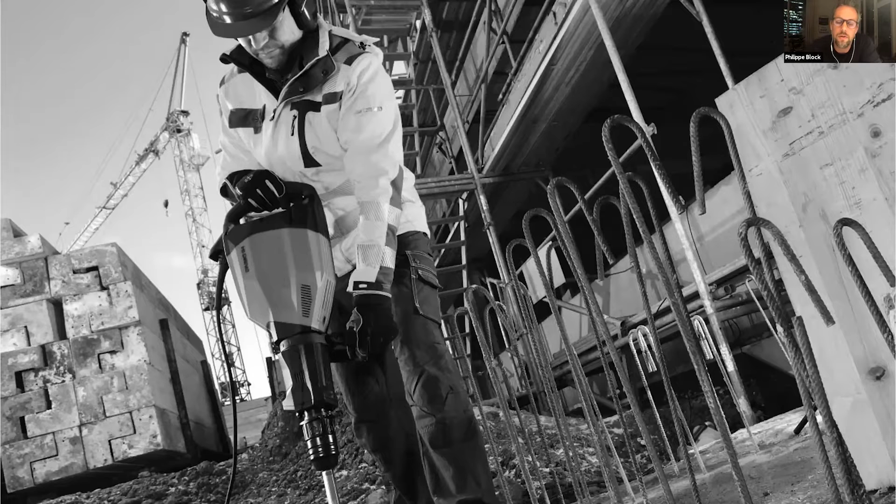I really hope that it will not happen like this, like we have been constructing in the last century, practically. And the reason I say that is because globally we are a major polluter as an industry. Building and construction are responsible for almost 40% of human-made greenhouse gas emissions, 40% of the use of virgin materials, so resource depletion is a big challenge, and 40% of global waste production, and in many areas of the world this is even much higher.

And then also, of course, the energy that all our buildings use, both in construction and in operation. So with these few slides, I hope that you agree with me that we desperately need to change the way and rethink indeed how we both design and build our structures.

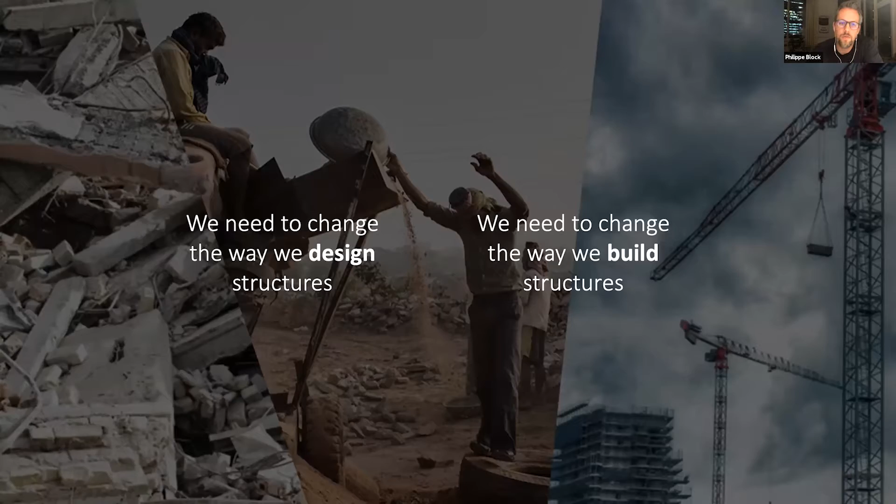As you heard in the introduction, I am a hybrid architect, structural engineer. So I wanted to specify that I will be focusing in my talk, and our work in general focuses on the embodied emissions associated to the built environment. That means everything that happens until you turn the key, until you basically start operating or occupying a building. So everything related to producing materials, construction, transport, and so on.

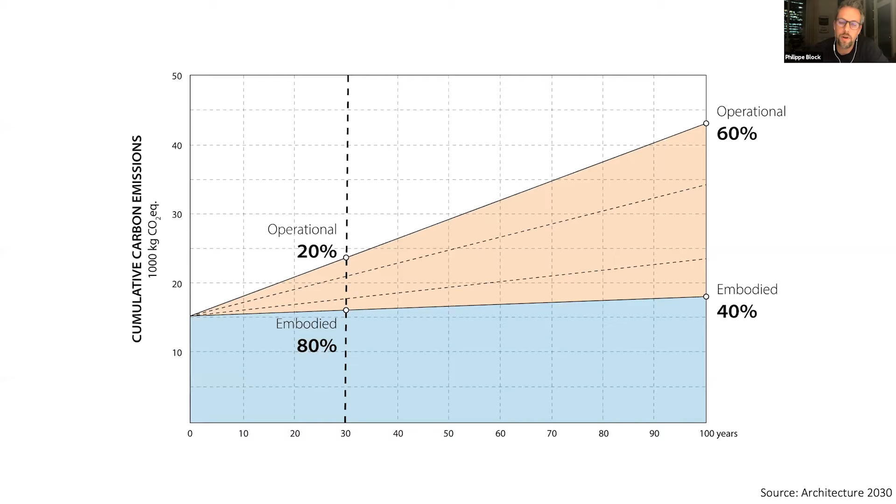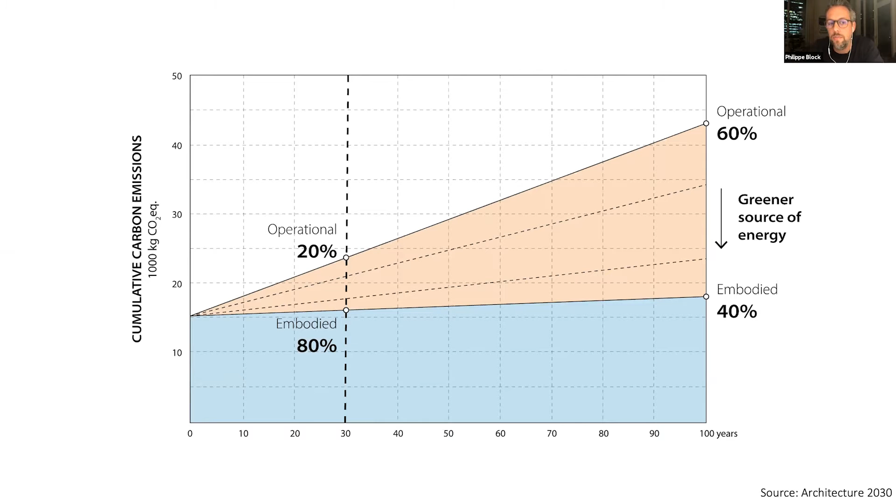I see this as the key challenge and a big bottleneck to focus on these embodied emissions, because, maybe cheekily said, or naively said perhaps, one has a theoretical solution for the operational energy, just going to green sources, renewable sources. So theoretically we would have a solution to deal with the operational energy, but we are still left with the embodied emissions. In order to really address what is a potential strategy, I like to use this equation.

Don't worry, there won't be many equations, or this is in fact the only real one. I borrowed it from my colleague, Catherine de Wolf, who did her PhD at MIT with the same advisor, John Ochsendorf. She describes, or dumbs down, the global warming potential into this simple equation that outlines what really matters.

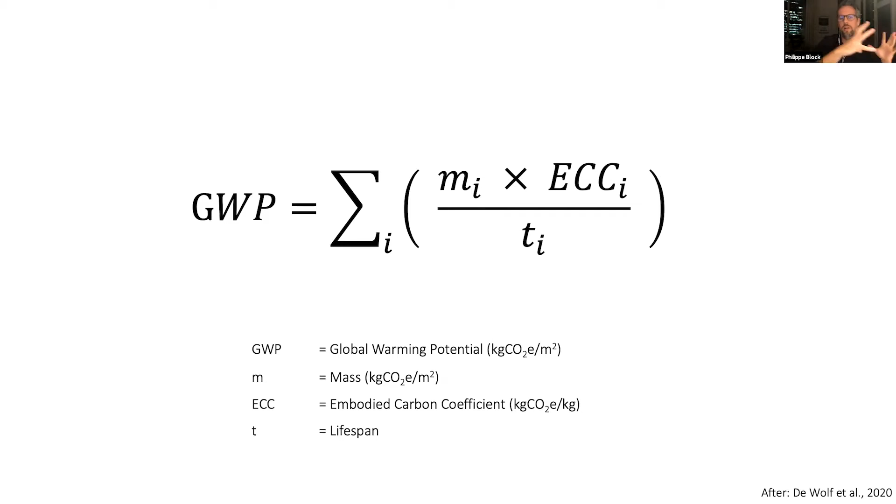She says you basically want to take the sum of all the parts in your building, and what matters is the mass, how much material you use, but also the ECC, which stands for embodied carbon coefficient. This is a representation of how polluting, how bad a material is towards the climate. So it's not just about building lighter, with less material, but also about using the right materials, low pollution materials, and so on.

And then lastly, all of this is divided by the time that a material is used. That's the framing of circularity, where we want to ideally extend the lifetime of a building by designing for future use and adaptability. If that's not possible, we want to design for reuse of components and parts. And again, if that's not possible, we want an efficient recycling outlook to keep materials in the cycle. So this equation really clarifies what we're after, how we can combat embodied emissions.

It becomes clear that as a structural designer, you can have quite a bit of influence here. Our group approaches this problem with two concepts: the first we call strength through geometry, and the second material effectiveness. I'll explain both, but they're of course related to the equation I just pointed out.

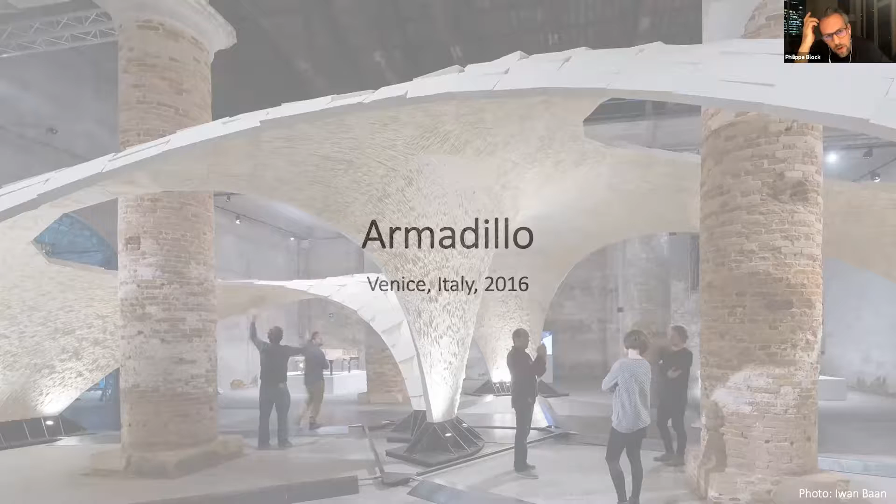Let's first look at strength through geometry, by walking through a few projects we've done. I want to start with the Armadillo Vault that we built for the 2016 Venice Biennale. What you're looking at are 399 cut pieces of stone held together by gravity and geometry only. There's no mortar, no glue, no reinforcement holding this together. This already demonstrates what you can achieve when you get the geometry right.

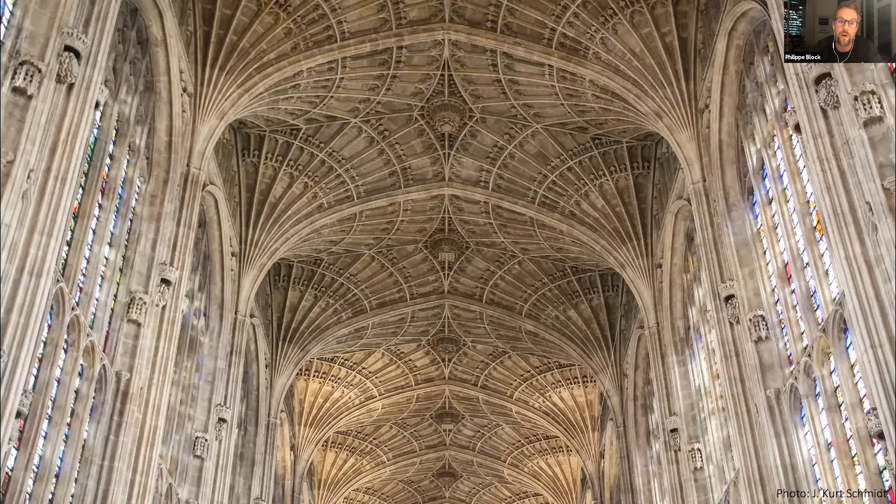The reference, or inspiration, is of course from my PhD at MIT with John Ochsendorf on the assessment of historic structures, these beautiful structures, trying to find tools to explain why and how they're standing and how long they'll still be safe.

What you might not see in these beautiful fan vaults at King's College from below is that if you were to calculate the thickness of these large stones, kept in compression because of their good geometry and not because we're adding materials, reinforcements, or high-tech solutions, the thickness of this shell over its span would be proportionally the same as an eggshell. This was mind-blowing to me, and it made me realize that modern engineering had perhaps forgotten some key concepts that made these structures possible.

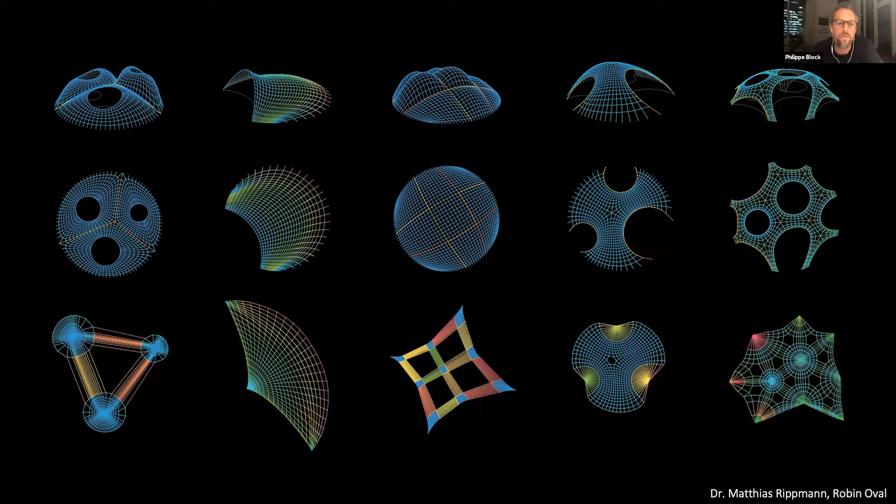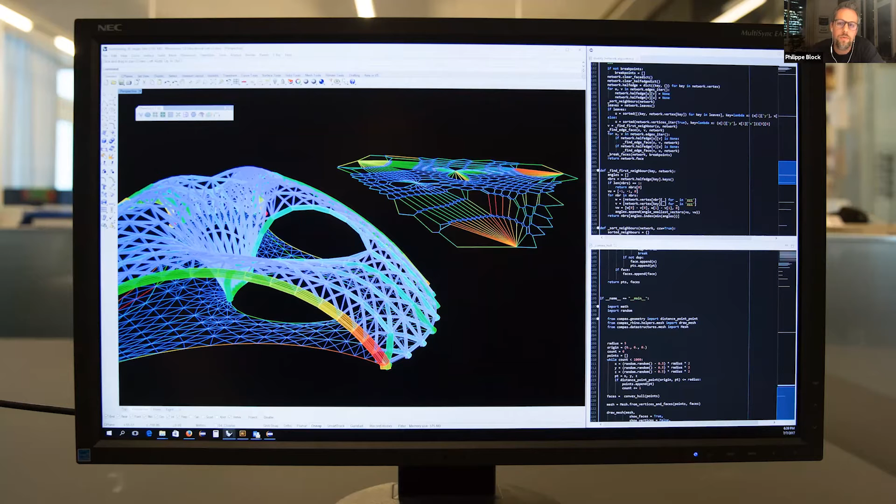So we've been developing tools, including graphic statics-based tools, meaning quite intuitive methods that allow you to rediscover these kinds of geometries. We feel strongly about sharing everything we develop. This is a print screen of this shell's initial modeling done with RhinoVault, a tool we share openly so others can discover these same elegant geometries. I want to emphasize that this super thin shell, just 2 inches thick, of dry assembled stone, is stable and safe because of its geometry, not just by adding materials.

Here you see the team out of Austin, Texas, the Escobedo Group, assembling this spectacular statement. We did this crazy vault not necessarily because we need more stone vaults in the world, but to shake the community, to show what you can achieve through geometry. You can activate these humble materials, and rediscover the elegance of why cathedrals are still standing after centuries.

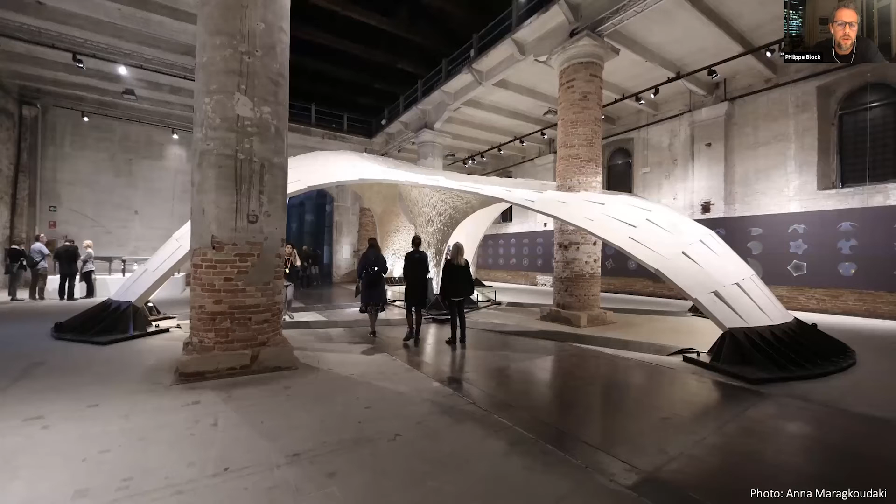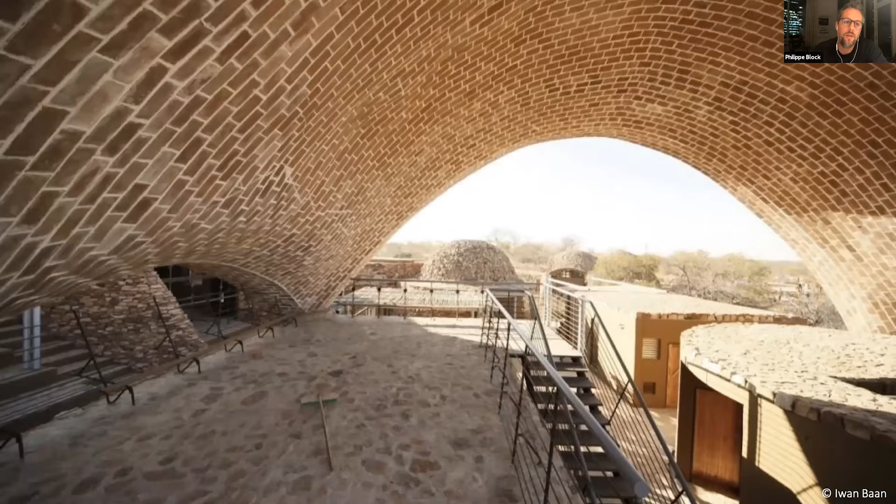A next project that fits the framework of strength through geometry is one I was lucky to be involved with, Peter Rich Architects and John Ochsendorf. It's the Mapungubwe Interpretive Center in South Africa, a project with large vaults. It's a museum built predominantly with local resources.

So both local labor and local materials. The reference here is, of course, these beautiful tile vaults that we see all over the US, by the way. This is a Mediterranean technique, Catalan vaulting, Guastavino vaulting. The Guastavino is built, for example, here at Grand Central Terminal, the Oyster Bar. What you're looking at is actually one of 3 layers of unreinforced tile.

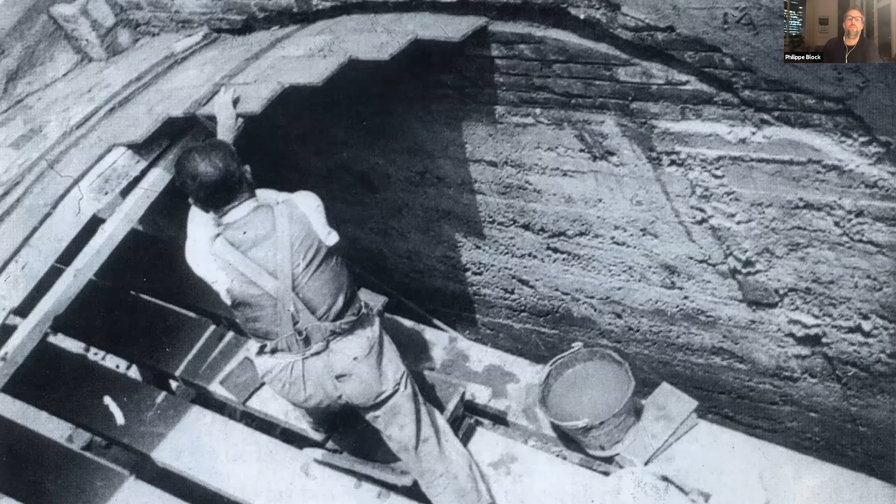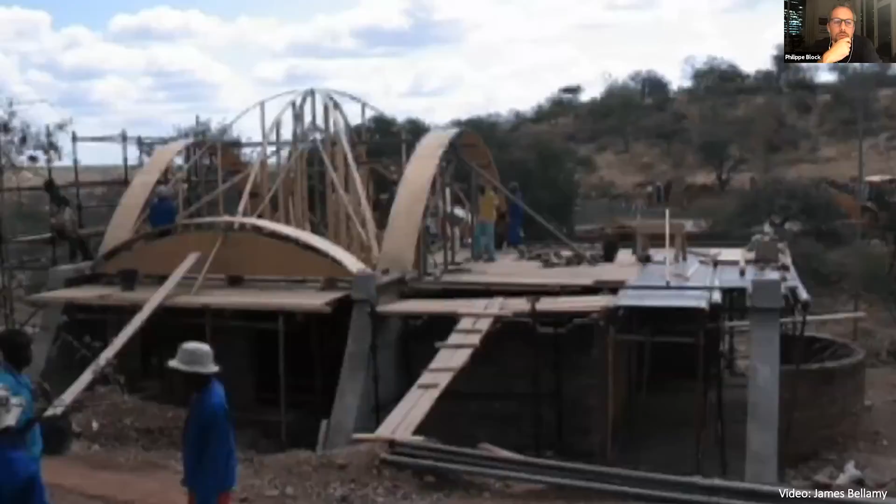This was a relevant reference because, as you see in this image, the technique allows you to realize these geometries without needing formwork from below. So you build in stable sections, which was ideal with minimal guide work. This bent timber you see here is guide work, because these are literally farmers and carpenters building in this new technique without a lot of effort.

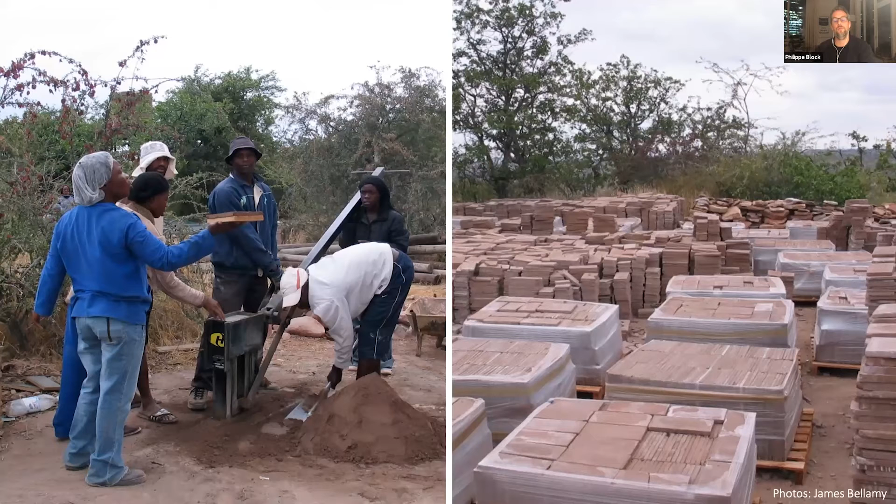The reason I want to talk about this whole project, in the argument of strength through geometry, is the materials. The materials were locally made—just soil pressed with a little bit of cement, 7% cement to stabilize the bricks. They didn't have to be fired. There is no energy except human labor going into this.

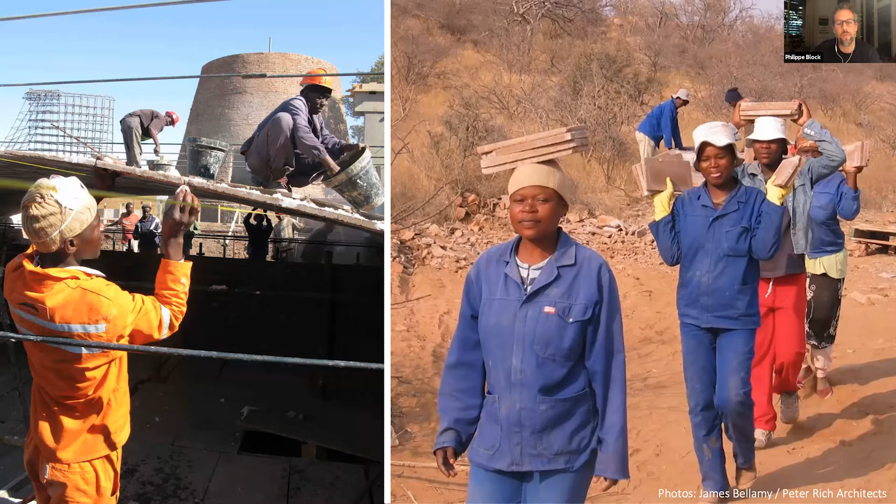What is worth pointing out is this image. On the right, you see women from that small town carrying the tiles in very small packages. That's because the tiles are designed for only 2 megapascals in compression—basically peanuts, 10 to 15 times less than standard concrete. If you hold one of these bricks in your hand, you can just break it in bending. So it's an extremely weak-appearing, non-structural material.

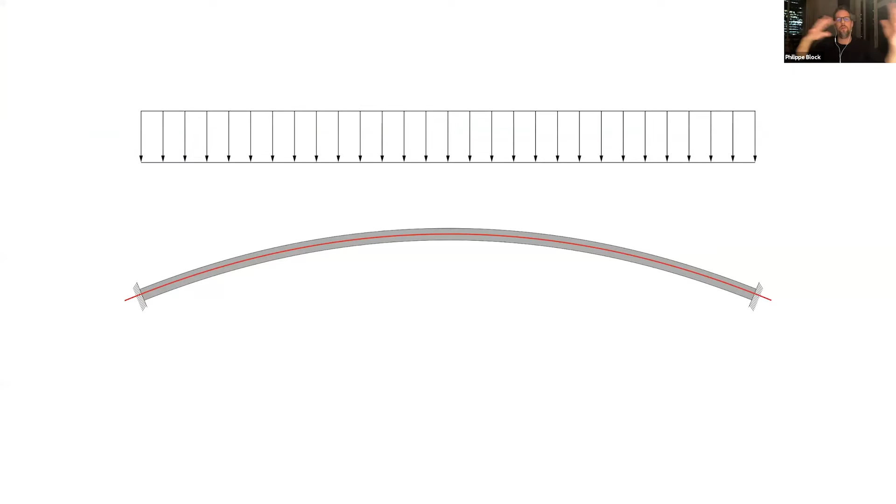But if you look on the left, if you place this weak material where the forces want to flow in compression, this is indeed a very safe and structural geometry—like they built in the past. So a small learning opportunity: if you don't have a lot of double curvature, like the historical domes or the stone vault we did in Venice, then you need something else to take live loads.

The red line represents where the forces want to flow in compression. You see here that this red line cannot be contained within the geometry, which literally would mean collapse. So one strategy would be to add local stiffeners, which allows a path in compression to go to the supports.

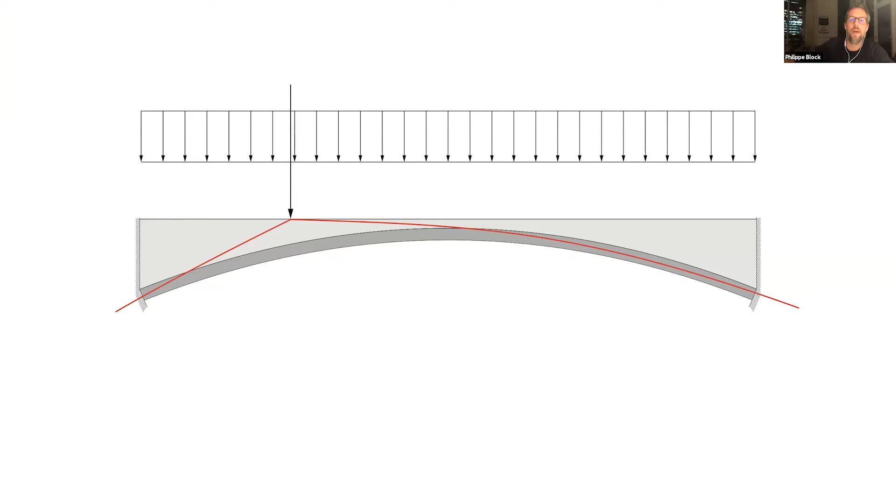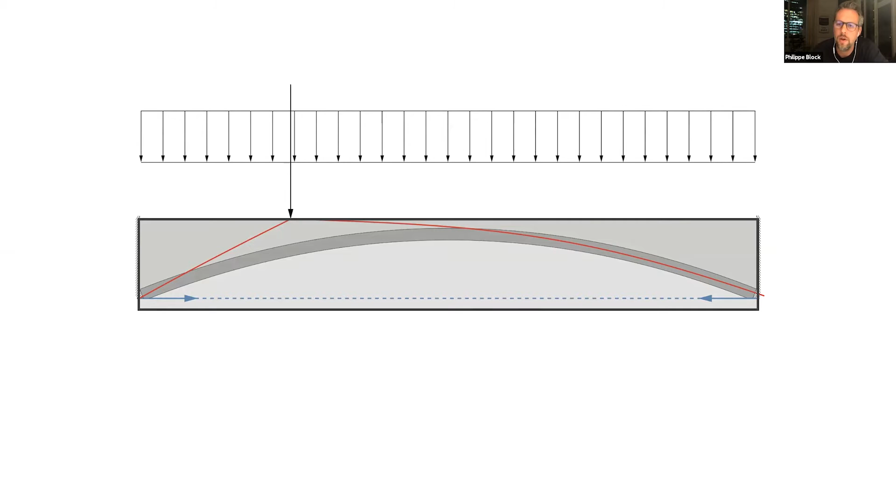If you then add a tension tie, what we've just done is developed a perfectly equivalent alternative to our all too common reinforced concrete beam or floor plate, but one that uses 70% less material. This, to me, is very powerful.

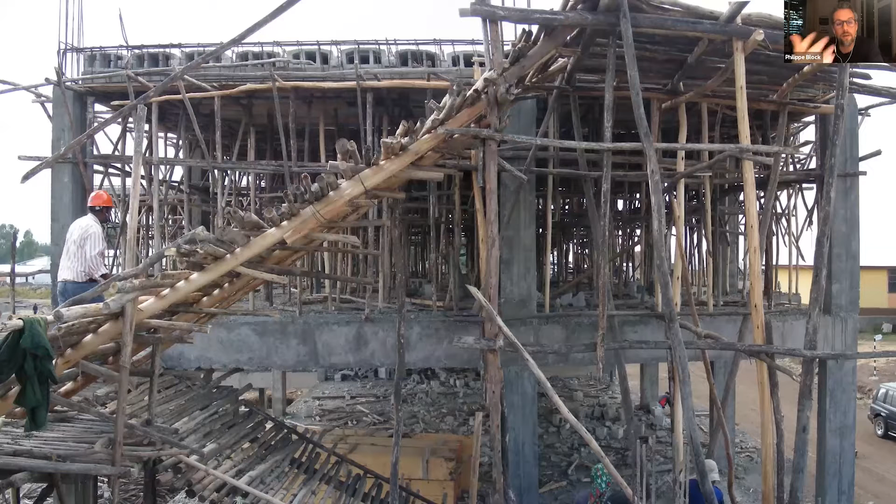Why I wanted to talk about this project is because it shows that you can not only assemble humble materials, but these materials can be very weak. This becomes important because lower strength materials are typically significantly lower embodied emissions materials, so lower pollution materials. At the same time, we save so much volume of material used.

I'm lucky that we can continue doing this work to hopefully provide more appropriate construction paradigms, to fight this image I took myself in Addis Ababa. This is the current state of low-cost housing, but you can already probably see that this is probably not how we want to go about it.

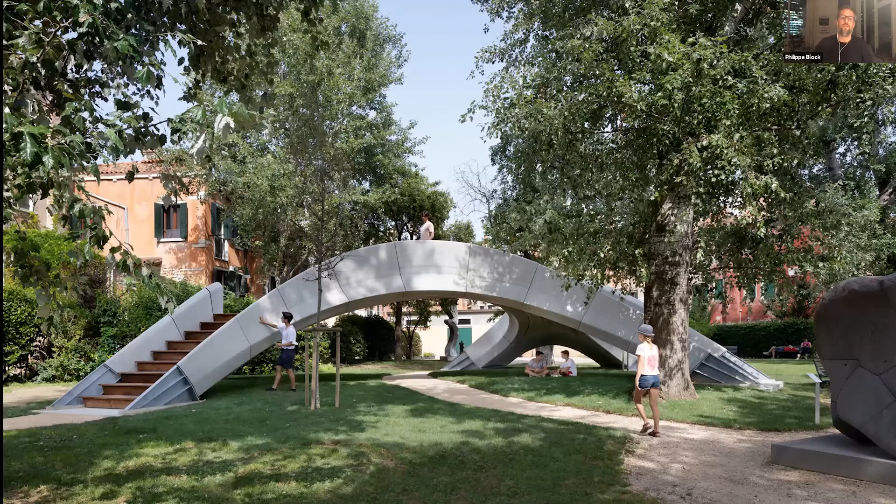The next project is the most recent one that we built. It's the Striatus bridge, still on display in Venice. What you're looking at is a concrete 3D printed, unreinforced masonry bridge.

With this project I wanted to provoke a bit, because there's so much effort and research going on in concrete 3D printing. In my opinion, perhaps many of these researchers are fighting against some of the natural results you get from this fascinating large-scale additive manufacturing approach.

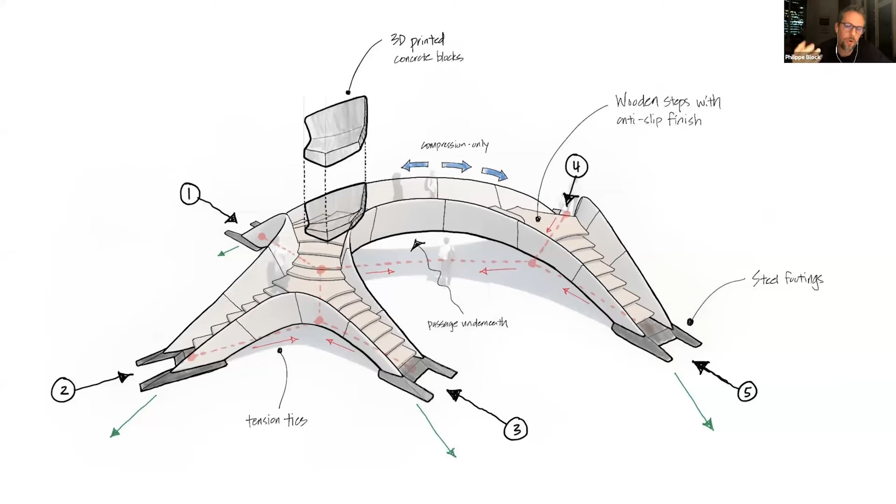The reference for this project is masonry on two levels. The discretization of the structure is like a Roman arch with large stereotomic pieces. Then on the level of the 3D printed elements, we also align all the print paths so they are locally aligned to the dominant force flow. So that is what we are showing—another version of strength through geometry, with an en vogue material that everyone is excited about.

What we wanted to demonstrate is how we approach the design, rather than doing an uninformed design that you then need to start to slice up and try to see how you can print, and then do the engineering and so on.

What we do here, and this is the PhD work of Shajay, is to start from the print path. The print path has all the limitations of the fabrication, all the structural global and local constraints encoded. So the print path becomes explicit and the geometry implicit. This is a fundamentally different way of designing than what typically is done.

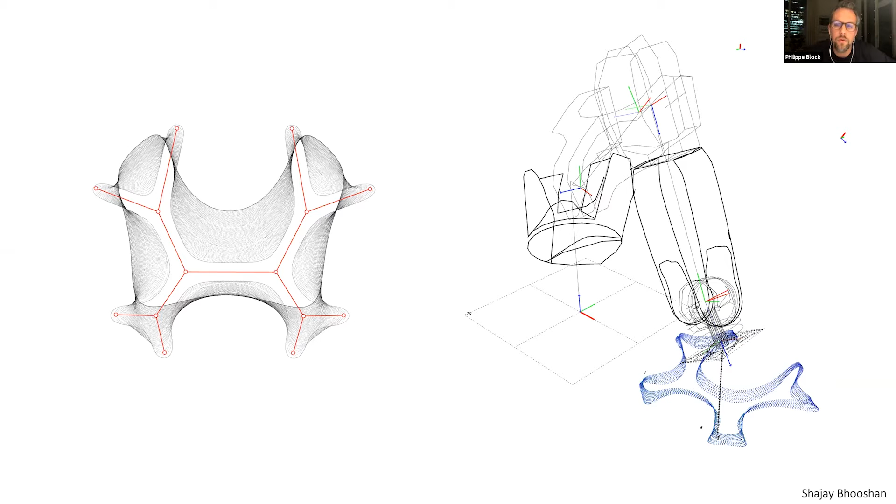And in the bridge, we wanted to show that you can actually come from both sides, that you can negotiate from the local definition informed by constraints and also balance this with a global idea of where you want to end up.

So for this project, we use what is called 2-component 3D printing, not the typical extrusion-based 3D printing that we see often in the news. Why do we use this 3D printing? It offers more control and allows all the non-uniform layers to be aligned to the force flow.

It also allows us, on the inside of the large pieces, to reduce the volume and to place material not only globally along the arch, but also locally to optimize the pieces, which would not be possible with subtractive methods or casting or things like that.

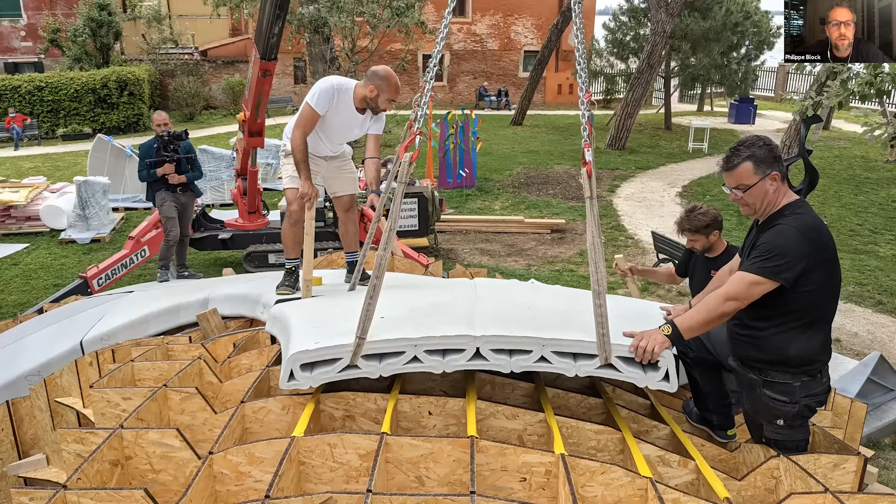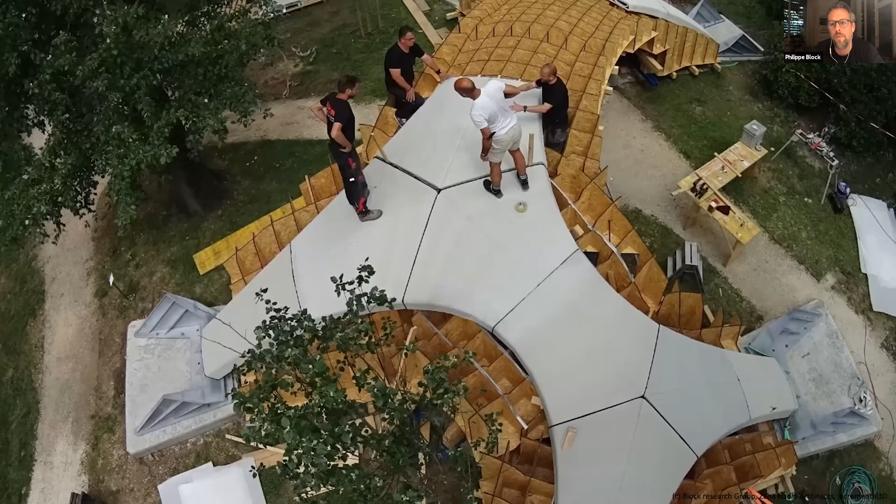So then, like a masonry structure, my team, together with a small crew of contractors, assembled this bridge very fast and very easily. Here you see a little bit also the very small spider crane that was needed to basically assemble this nice little structure.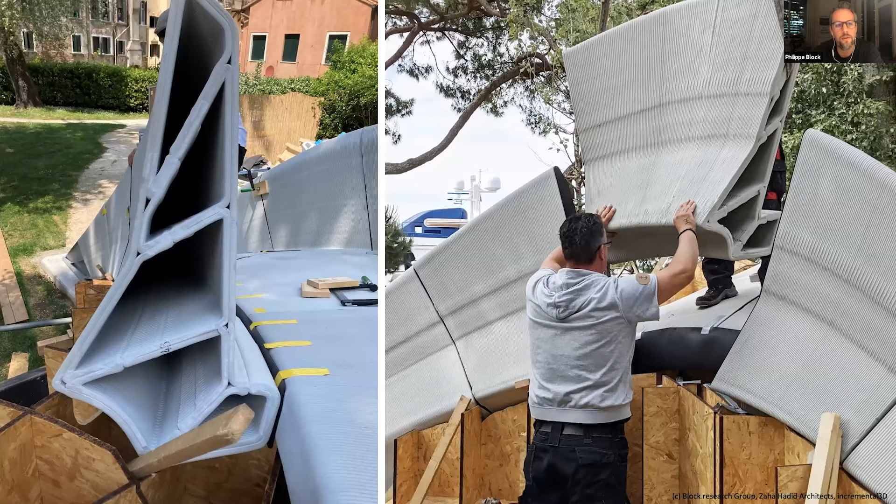What is maybe interesting to point out is that all the pieces are purely unreinforced concrete, so they will be very low energy to recycle at the end of their lifetime. But what you also see on the right is that, again like we showed with the stone structure, we have a dry assembly.

And perhaps for a bridge this is less relevant, since maybe you don't want to move your bridge around all the time. But more generally for prefab construction, having this kind of self-registering compression joints and full demountability is an interesting topic if you think of end-of-life reuse of full components and so on.

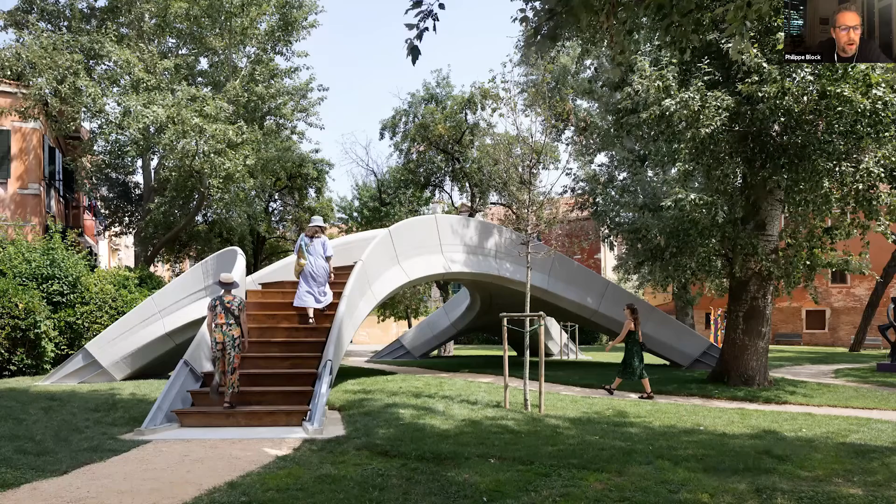Because this is the latest project, let me show a few more images of what we did here. Perhaps interesting to point out, on the left, is that all the little creases and features that you see are not frivolous - they're actually an expression of the stiffness on the inside.

So all these different techniques were developed to make the bridge really speak the language of the fabrication and the structural constraints. Also, here on the side, you see these additional lines in the balustrade blocks - they are actually the imprints of changing the nozzle and making the stiffness on the inside.

So again, you see that we try to celebrate and globally coordinate these features so that they could also become potentially an exciting architecture.

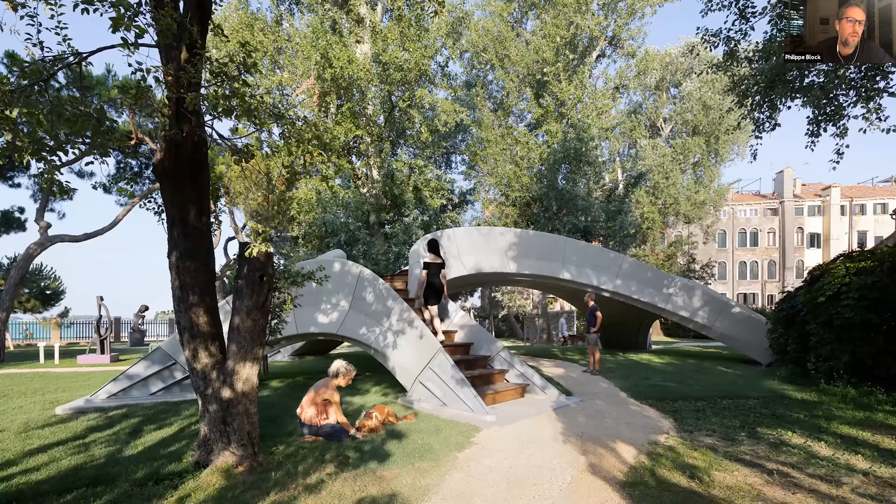This project was done together with Zaha Hadid Architects, specifically with a computational and design group led by Shajay. The amazing 3D printing was done by Incremental 3D out of Innsbruck, and the concrete ink was developed by our partners Holcim.

Here are a few more images. These creases that I was talking about, these features that appear, are really an artifact - but an artifact that we then control, which comes from the internal logic and other aspects in the 3D printing.

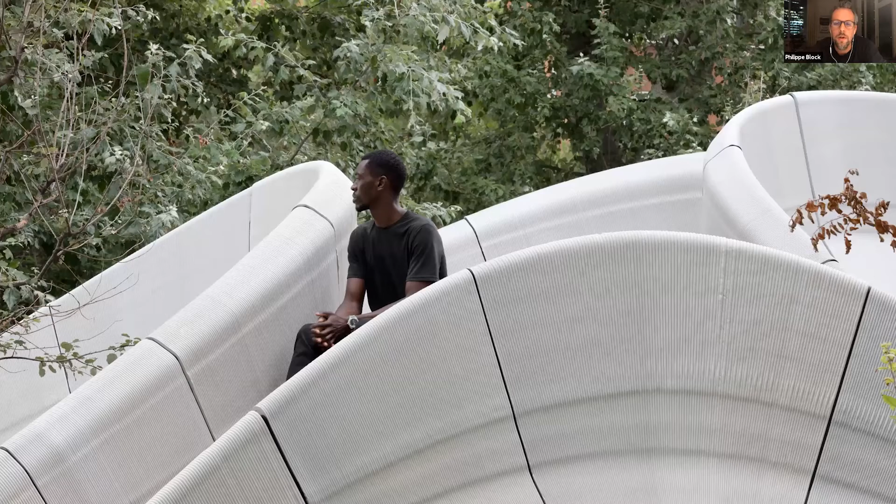So as I said, it's still in Venice, only for a couple more weeks. So if you happen to go around, be in Europe, then still go check it out.

The next project that I want to show is KnitCandela. There, I'm shifting gears a bit. It's actually no longer about strength through geometry, but about how to realize these non-standard geometries in efficient ways.

Another collaboration with Zaha Hadid. This was a pavilion that we built for the largest exhibition of Zaha Hadid Architects in the Americas. This is a thin fiber reinforced concrete shell that we call KnitCandela.

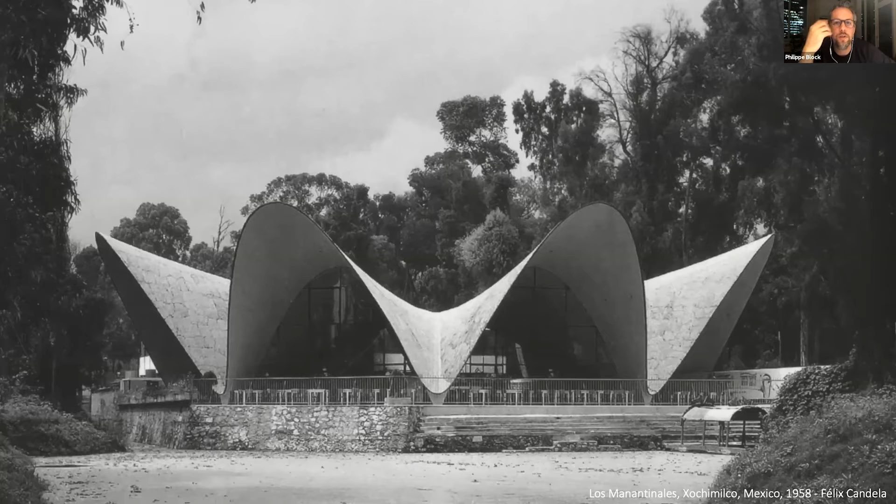It's of course doing homage to the shell builder Felix Candela in Mexico, who built these spectacular geometries, 30-meter spans - what is that, 90 feet spans - with not even 2 inches of structural depth. These are absolutely spectacular.

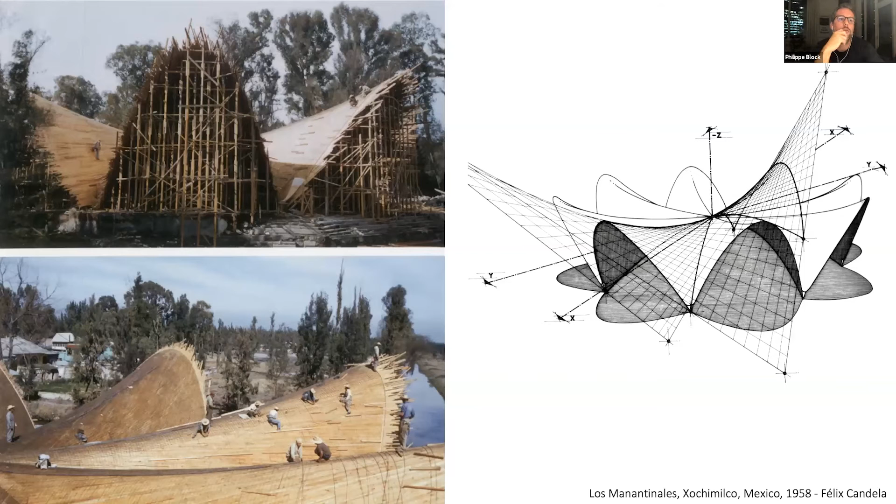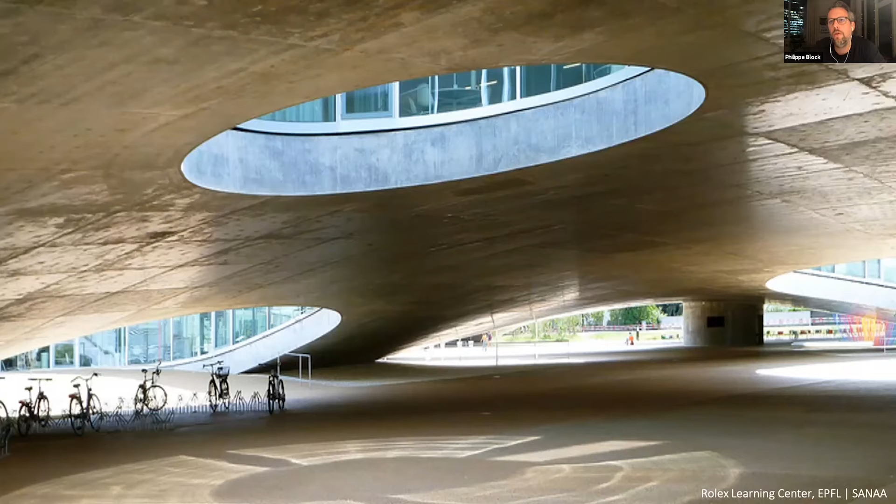But of course they come also at a cost - the formworks are not easy, they're labor intensive. These are things we can no longer imagine nowadays. The same is true for modern curved concrete structures like the Rolex Center by SANAA here in Lausanne.

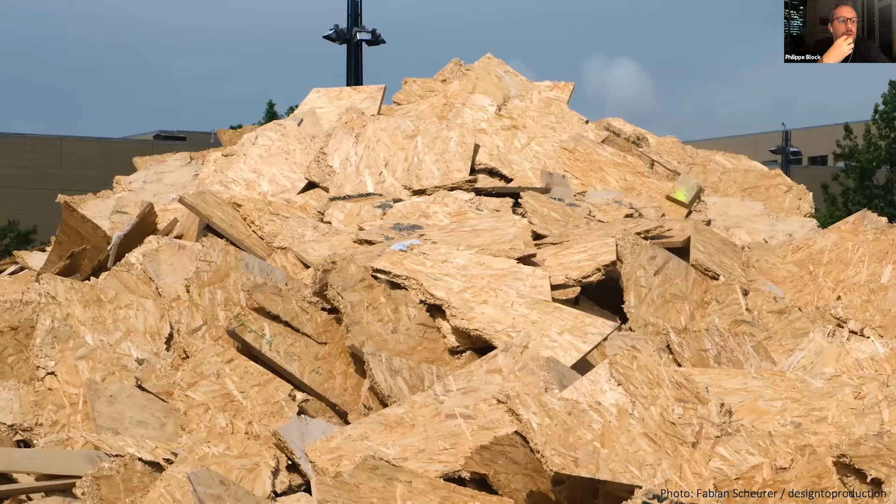If you look at how this beautiful structure was built, you see that on the left we need a full foundation, then quite a lot of scaffolding, and we built this super beautifully detailed timber construction that will last 28 days until the concrete hardens. And then sadly, it's turned into a pile of single-use trash.

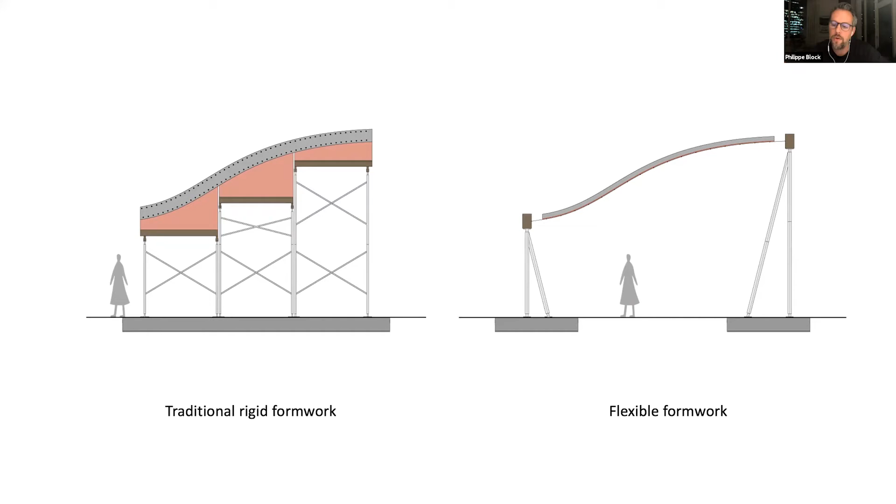So in this project in Mexico, we used a knit, literally the same as what is used for a sweater or to make a technical brace for your knee. We used such a knitting machine to make this ultralight formwork that could be knitted on a typical knitting machine.

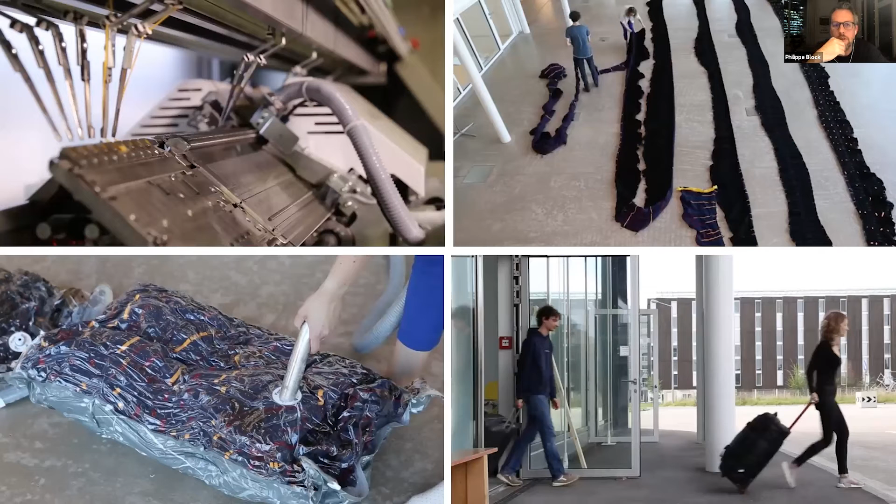On the top right, you see arguably the largest scarf in the world being knitted by Mariana and Lex, and then vacuum packed. And then literally the entire formwork was brought on site in two suitcases, traveling economy from Switzerland to Mexico.

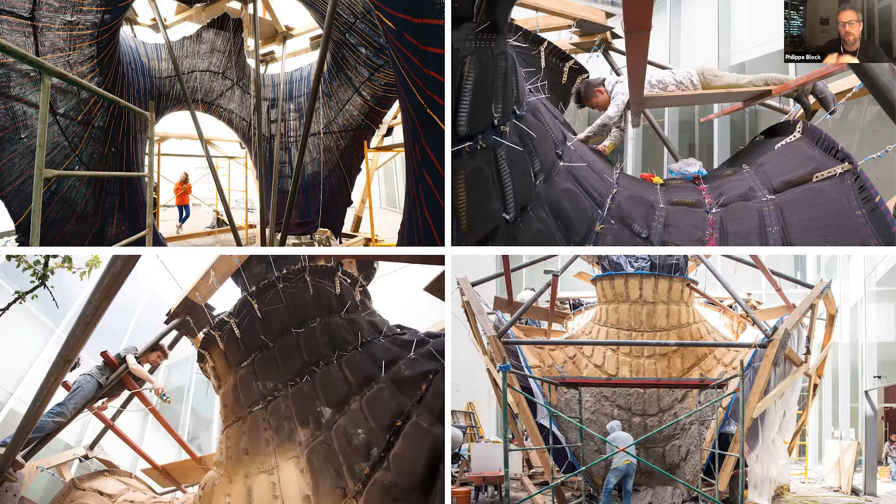This then allowed on site to install this knit. What's maybe interesting to point out here is that all the complexities of the geometry - this is a stiffened shell, with stiffness running in both directions - all of this complexity was basically embedded in this one logistical device, in this knit.

That basically allowed us to work together with local laborers, with local expert concrete finishers. So it allowed us to use the best of digital fabrication and combine it and enhance also local crafts and local kind of opportunities.

In this project, we left the knit in place as a unique kind of insight or texture or aesthetic even to the shell. But here in the top view, you see how thin the shell is - it's indeed only just over an inch thick. And in between the fabric, you actually have this double layered stiffness running. So all of this was possible with this very simple formwork indeed.

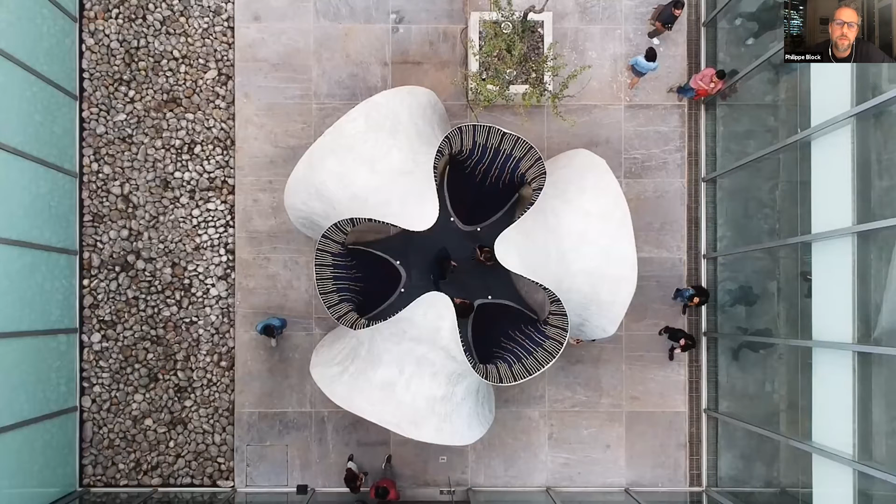What's maybe interesting here is to look at some numbers. We realized 500 square feet of surface area, which translates to 5 tons of concrete. The entire formwork cost only $2,500 US. And this 25 kilograms, a little bit over 50 pounds, was the weight of the formwork.

But what's maybe even more interesting here is not just the efficiencies in the shaping and the flexibility that you get, but that between the invitation email and the opening of the exhibition, there were only 3.5 months. And if you do the calculation for having to mill such a formwork, you would easily be milling for 3 months nonstop. In this case, the formwork took only 36 hours.

Which of course also allowed us to extend the time of prototyping, getting our engineering tools all synced and so on. So this is also a demonstration of rethinking how we collaborate. We do this through our computational framework COMPAS - I will talk about this later as well. But this is also a necessity to introduce these kinds of innovations.

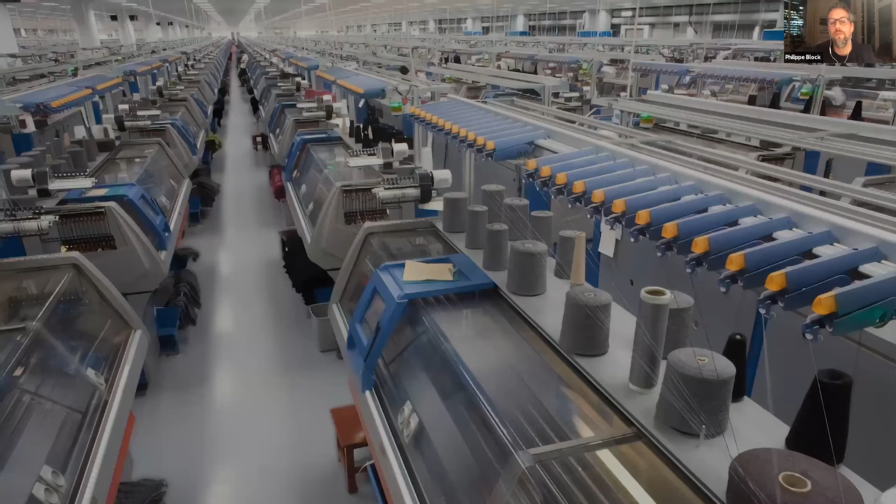But what is better than sending 50 pounds to the building site is, of course, sending only data. And one could imagine, with these knitting machines being readily available all over the world, that this could be a decentralized kind of fabrication approach.

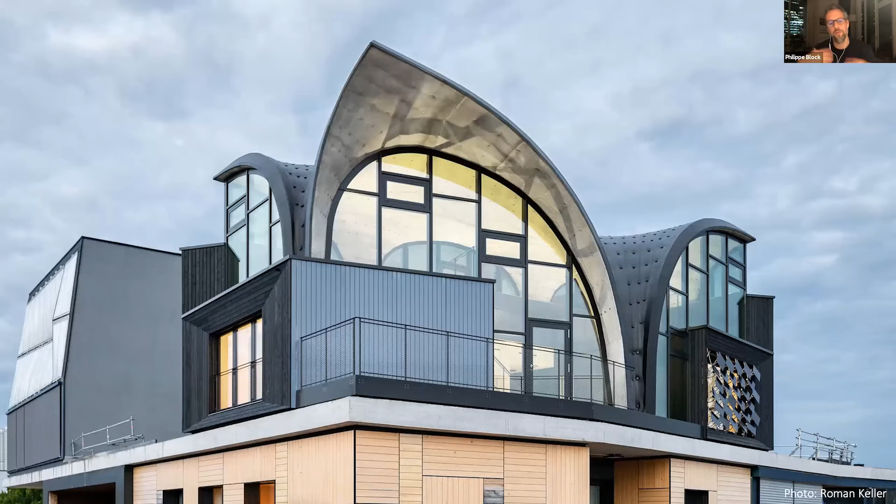Okay, this was now a pavilion, but we got to build - this also got inaugurated a month ago, roughly - the HiLo unit, which stands for high performance, low embodied emissions. We kind of wanted to make a bit of a statement. The roof is total overkill, total crazy, but it gives at least someone a very exciting office space.

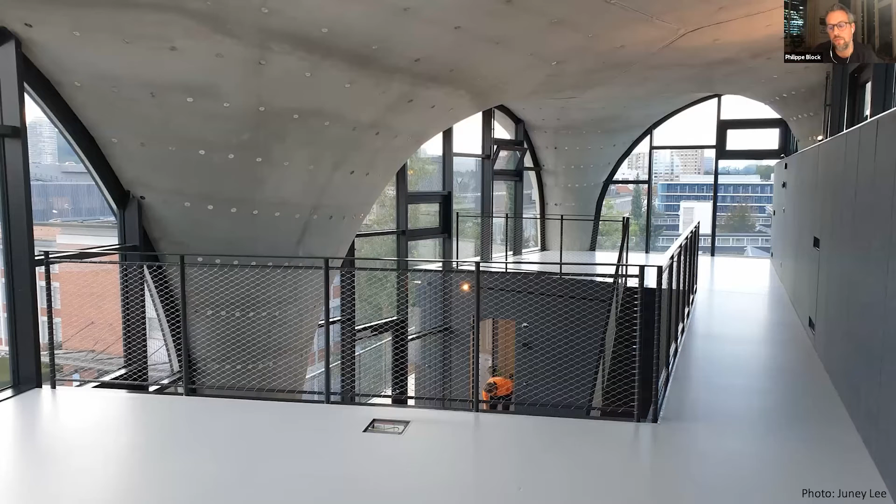This roof was built within actually within 3 millimeters, so very small tolerances. We realized this project on site with typical industry partners - this is one of the key demonstrations here.

And so we used this 100% reusable kit of parts that we had developed and also used for our full-scale prototype to build this efficiently, on time, on budget, on site. So this was a nice achievement.

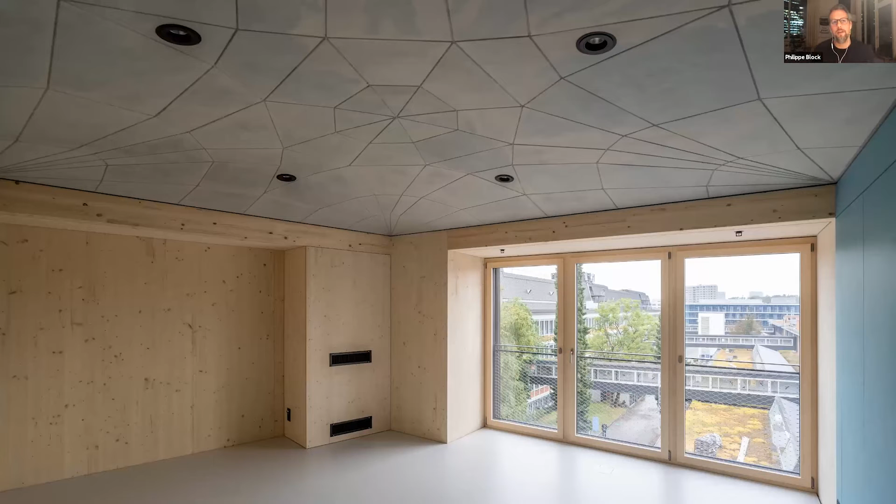But I'm excited to talk about this project because it was also the premiere, the first time that we could show our floor systems. And here you see that the floor has something recognizable - it has double curvature like you see in many of our projects.

Okay, sorry, COMPAS comes here suddenly in between.

So all of this was possible, coordinated through our open source framework. As I said earlier, we not only share tools, but we also share all our algorithms. Not only us, many people at ETH, also now MIT, Stuttgart, and many other institutions are starting to share all of their algorithms in a compatible way through COMPAS, this open source framework, which was initially developed and launched by our research group, developed by Tom van Mele, as you heard earlier, with whom I co-lead the research group. This allowed us to bring this innovation into a real project, but also to coordinate all these different partners with varying degrees of computational or even digital knowledge and expertise, and to bring all of this smoothly on site.

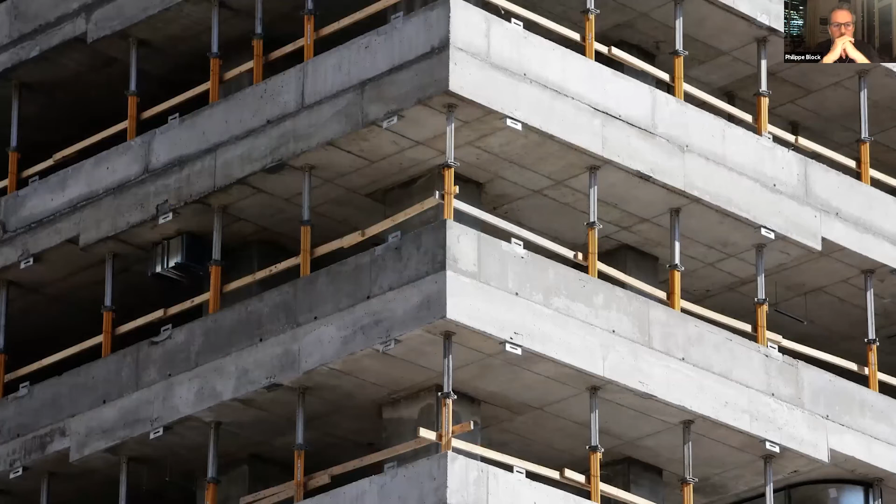But I was talking about the floors, and indeed, let's focus a little bit on building floors. The reason I say that is that another kind of translation of this One New York City every month for the next 40 years is that many of the urban areas will densify. We will have need for these typical medium high rises, 10 to 30 floors, housing, offices, and so on.

If you look at these medium high rises, this is a very typical image. What you're looking at is basically the mass distribution into such a building. And you see that 3/4 of the mass is basically in the structure, which to me as a structural designer was extremely shocking to see, because what you can then imagine is that the structure is mainly there to keep itself up, which is something that we should really address.

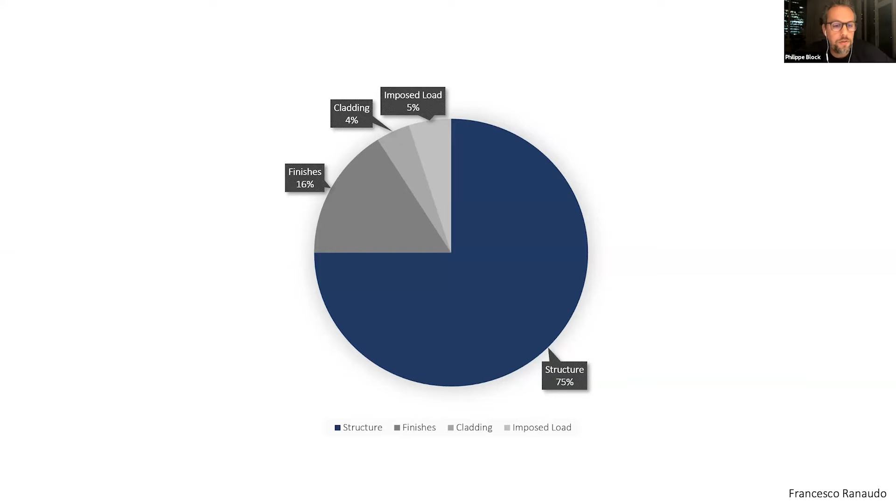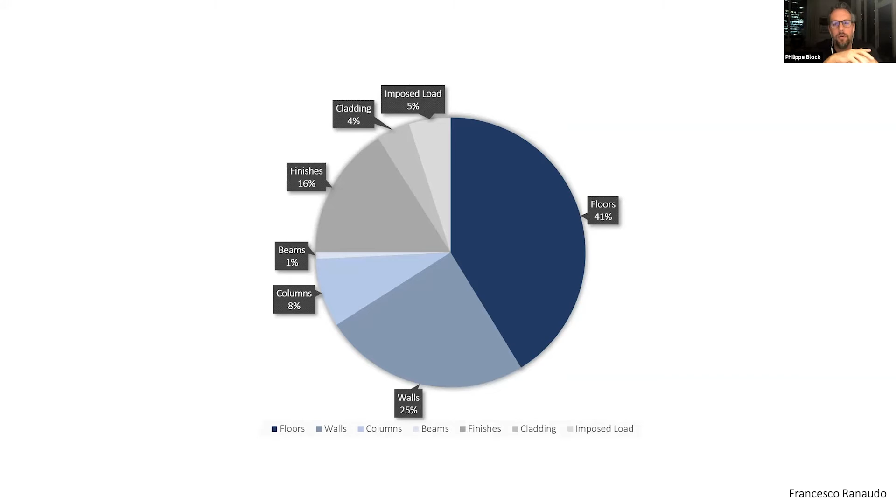If you then zoom in a little bit more, you see that spanning space, so providing floors, is responsible for more than half of that structural mass. So that means the key bottleneck, the most material intensive part, in global numbers 40% of the total mass of these structures is basically in their floors. Considering that we are expected to build more than 2 trillion square feet of floor area in the next 30 years all over the world, I would say this is worth looking into if we can find a solution. And I would also say this is perhaps quite a good business case as well.

That is where I want to shift to material effectiveness and maybe also address the gray elephant in the room. Why am I talking about concrete? While everyone seems to agree that wood is good and concrete is the most evil material on planet Earth, is that true? Is it true to say this just about the material? Is there maybe something else at play?

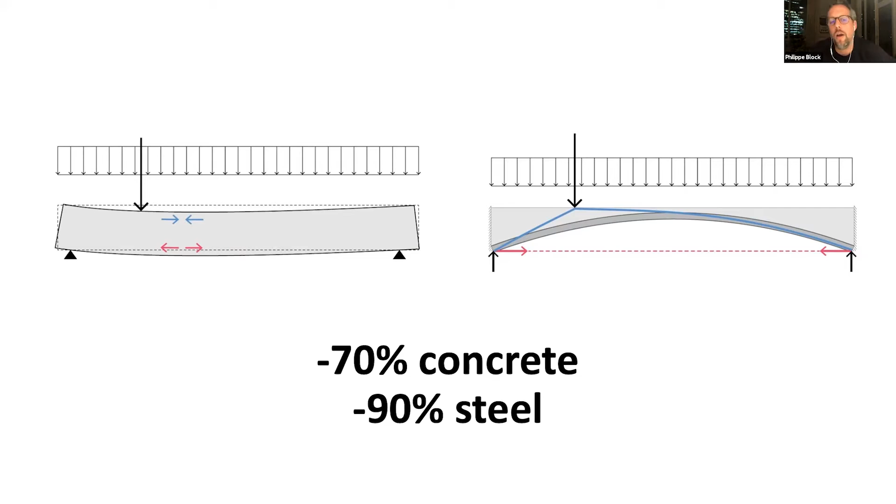And now that we have a maturity of digital fabrication at scale, perhaps we can reintroduce these non-standard geometries indeed. That is exactly what we did for HiLo. So we designed a 5 by 5 meter floor plate with 3 centimeters of unreinforced concrete. You see that the stiffeners now accumulate to the corners so that they can be elegantly balanced by a tension tie.

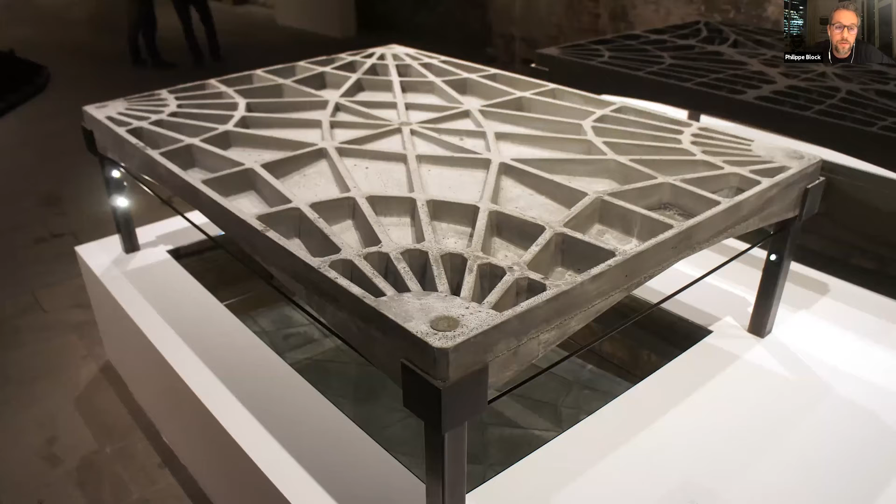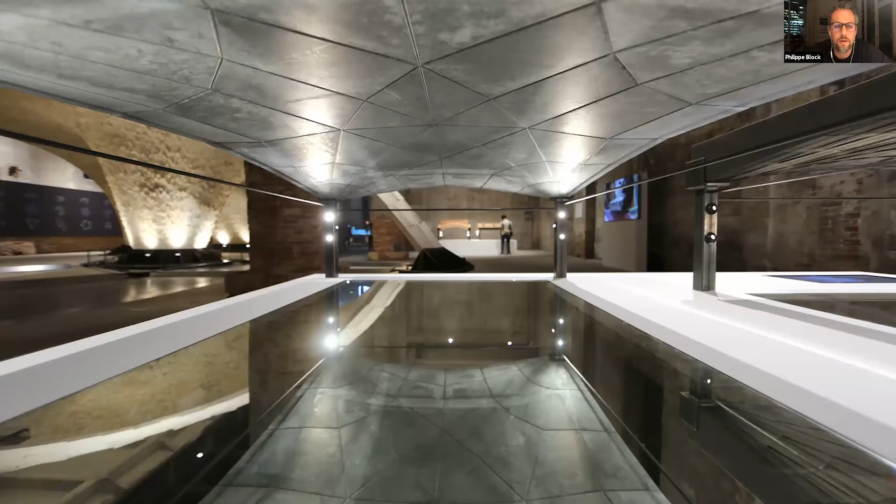This is not a new idea. It's an old idea that we now reintroduce because we have new challenges. We really need to find solutions to do things better. Here you see a prototype we showed at the Biennale in 2016. This project even started in 2011, so this is a long time coming, with a lot of research, prototypes, and experiments being broken, like this one.

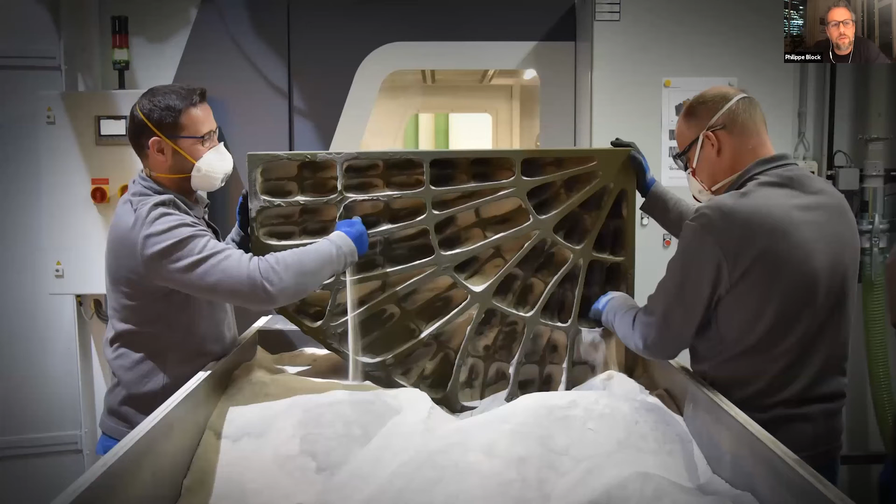And then you see indeed how thin, how light the structure can be. We also 3D printed at a certain point such a floor. It's a super weak material, equally weak as what we used in South Africa — peanuts in compression, and you can just break it in bending in your hand.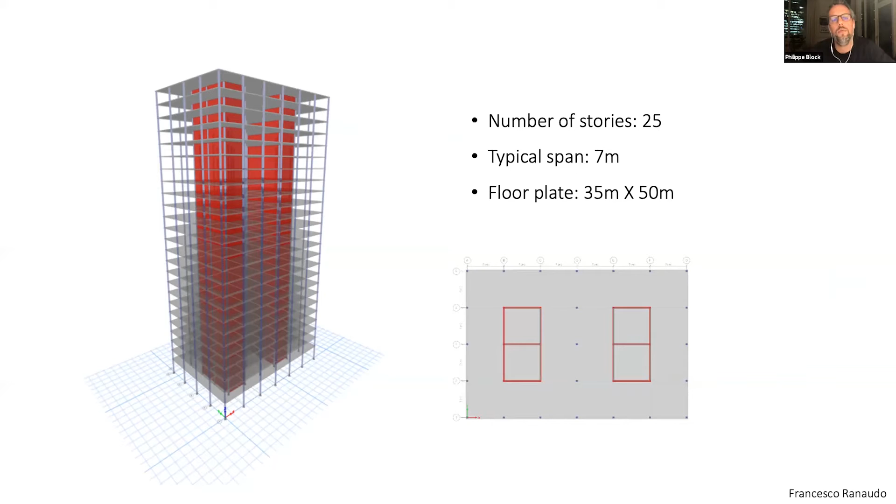Let's take one of these buildings, one of these typical towers — let's say 25 stories, very boring, very typical kind of floor plate. Let's see what that means, what it would mean to introduce our floor innovation, our lightweight floors, into such a building.

What we're basically trying to argue here is that more than 40% of the weight of the mass of the building is in the floors. On the left, you see minus 70% earlier, and 80% here. The reason these are slightly lesser results is because now we're talking about really high-rise construction, and that has to do with fire safety, 2-hour fire ratings, and so on.

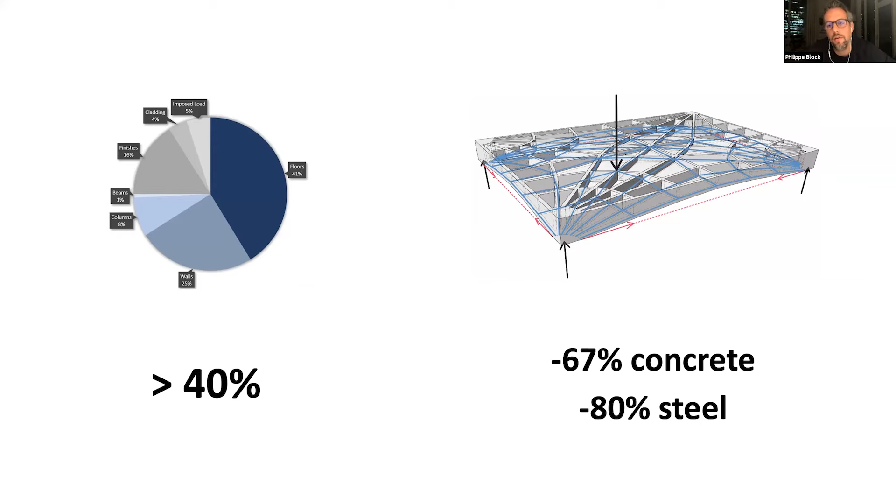So let's take these two things together and calculate for this one building. If we were to introduce these lightweight floors, we would save 9,800 cubic yards of concrete. Or if that's too abstract, that translates to more than 1,200 concrete trucks that don't have to go to this one building site.

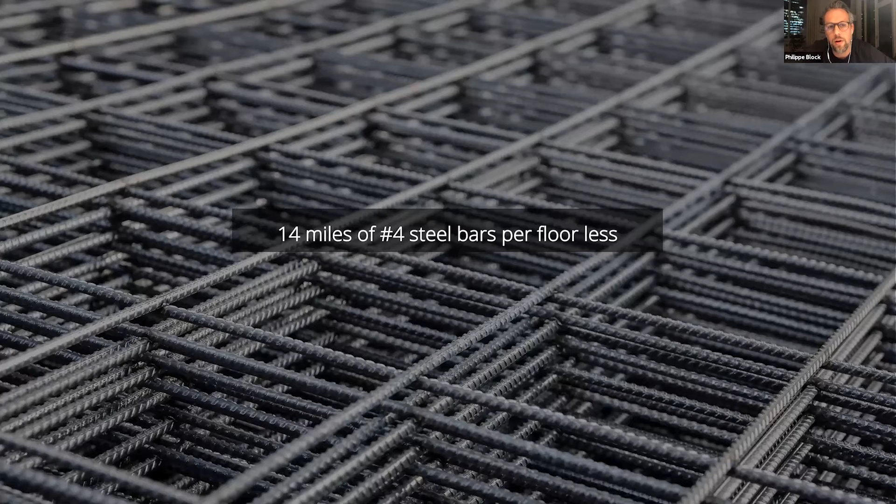Additionally, per floor, we save more than 14 miles of number 4 steel rebar for each floor. If you were to lay all of that out, it's like going from Zurich all the way to Brussels — a nice coincidence since I live and work in Zurich but am originally from Brussels. I tried to find an equivalent related to Houston, but it's almost to Oklahoma, I guess. Just to give you a sense of how much steel you'd save in this one building.

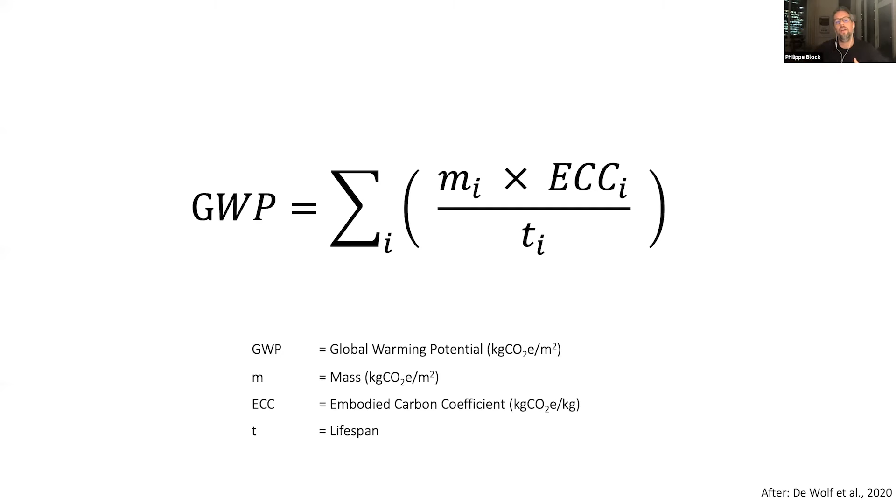But I said in the beginning, it's not just about volumes, not just about mass — it's a bit more complicated. Let's go back to the equation that Catherine introduced: the global warming potential. Remember, mass is important, so how much material we use and the impact of that material matters. And then, how we actually think about reuse, recyclability, and so on.

So first, what we can have — sorry to give you a few numbers, but I insist on doing this because there's too much talk about wood being good and concrete being bad. I wanted to do the numbers for you. That's also important for us because we're now trying to commercialize these floor systems, these floor solutions, to bring them to market. I can maybe talk about this a bit later.

So just by reintroducing the arch, we save almost 3/4 of the embodied emissions compared to the typical floor slab, the floor slab that would be built up to building codes and standards.

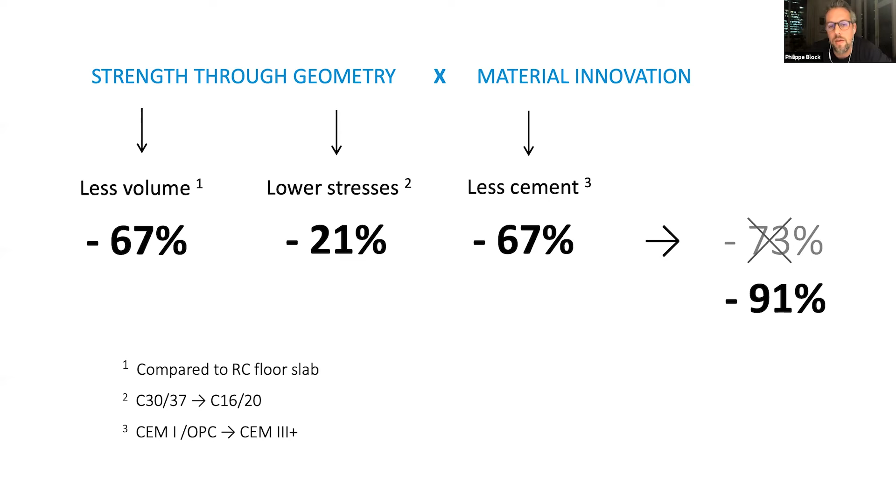So on the concrete level, we basically reduce the emissions by 91%. But then you need to still include a little bit of steel, around the boundaries. So that means that globally, we reduce with our floor plate the embodied emissions by 87%.

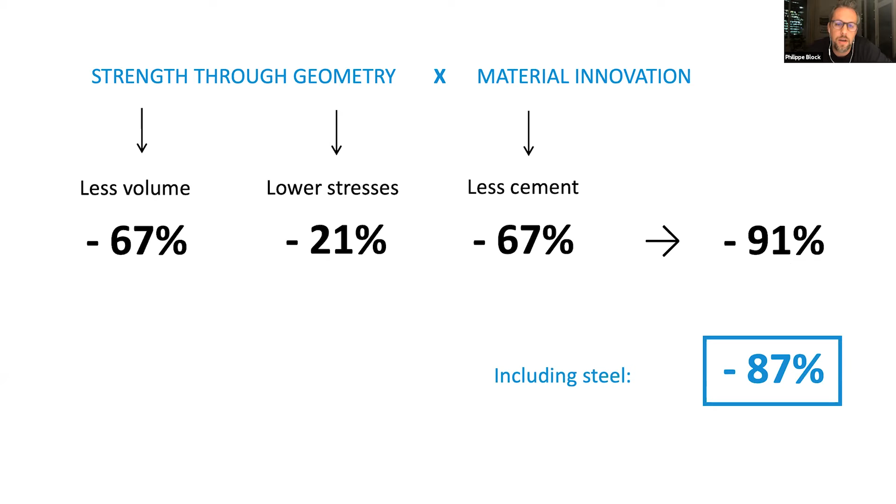I just want to put this out there, if there are sustainability experts in the audience: this is the real number we achieve, 23 kilograms of CO2 equivalent per square meter. If you look up the state of the art, this is a fraction of what a reinforced concrete floor slab would do, and also half of what a timber floor would do. One reason is that we are really lighter and use less material.

Why are we lighter? Because, and this sounds almost too good to be true, rather than adding mass to solve the low frequency transmission noise problem, which is typical — if you have a lightweight timber or steel construction, or any lightweight construction, you need, at least up to European code, an average of 350 kilograms per square meter. If you don't have that, you will hear your neighbors having a party, walking around, and so on.

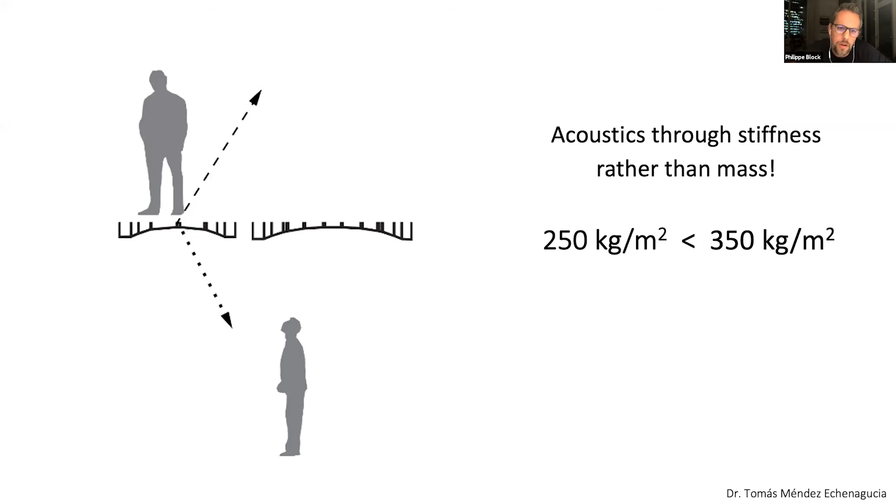What we've demonstrated in research, and now fully benchmarked in the HiLo project, is that we achieve this vibroacoustic performance through the stiffness and geometry of the shell, not just by adding mass. So this is great, because it means we are also 30% lighter compared to the state-of-the-art timber floor solution.

I want to quickly share a confidential project, because we're lucky now that architecture teams and certain investors and clients believe in this promise, and our collaborators and partners in this venture, Holcim, have stated that by 2023 this system will be on the market.

But what I wanted to show in this project is that we are also optimizing the system so we can have very elegant integration of building systems. Even extremely big ventilation ducts can fit within the floor package. And that gives us more floors for the same total building height, which is an important selling proposition, because it gives you more real estate, more return on your investment.

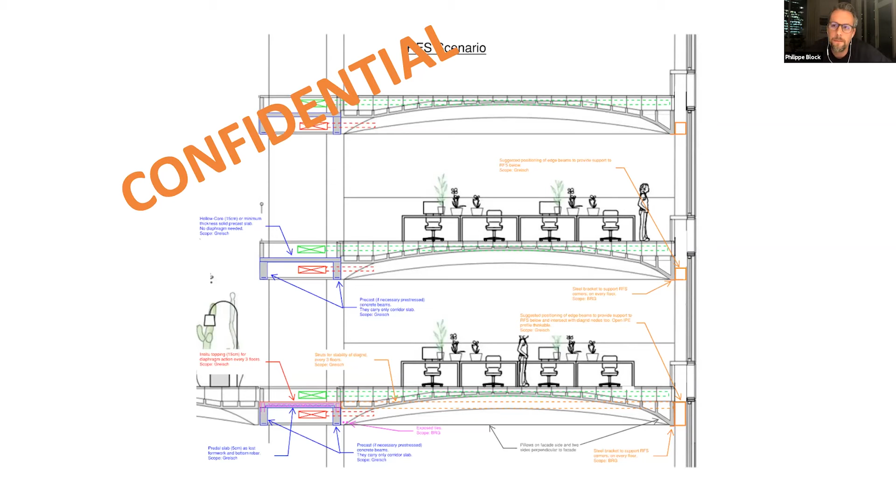And then the last thing, unfortunately I can't show too much detail, but it's related to the 3D printed floor we've done: the system we are now developing is an entirely prefab system, so it can be dry assembled like the bridge in Venice, fully demountable, so we really have an end-of-life strategy in reuse.

As I said, we have all these cavities which make it very flexible and customizable, so you can upgrade the building systems easily, so the building doesn't become obsolete before it needs to be reused. Because our disciplined approach keeps all the materials separate — unreinforced concrete and identifiable tension ties — that gives us a very simple and straightforward low-energy end-of-life recyclability.

And then a key advantage is that we still have enough thermal mass and concrete to use it to optimize the building system, putting significantly less pressure on the operational energy. So the reason I present our innovation so passionately, now that we are close to bringing it to market, is because when we look at this image, all of these buildings — this blew my mind as soon as I found it out — 40% of their mass is basically in the floor plates.

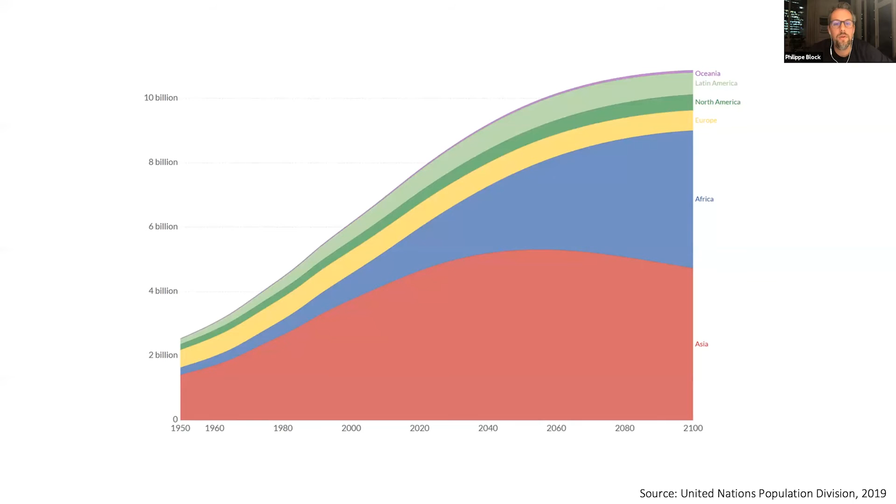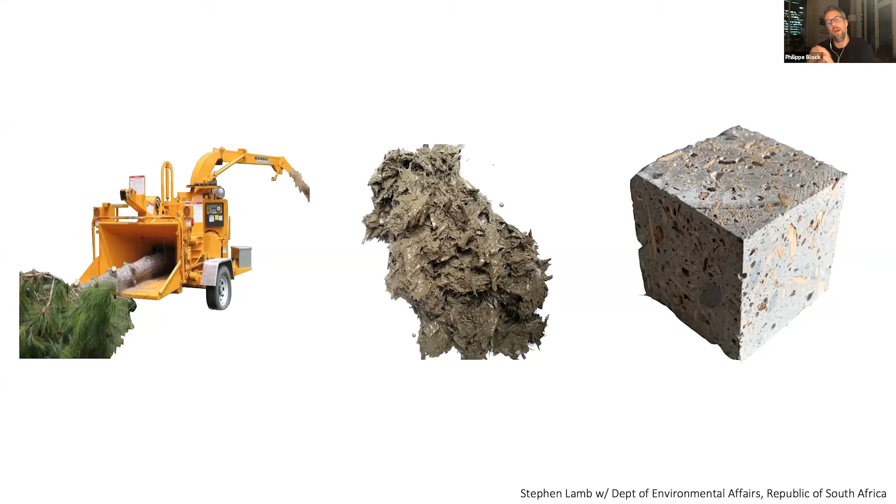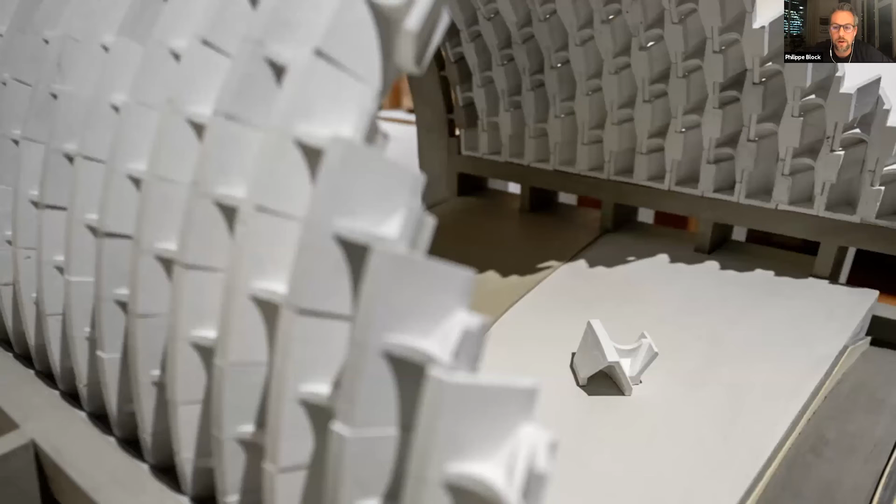We're also aware that most construction will not happen where I live, but in other parts of the world, and that's where I'm excited. This is also on show in Venice - a collaboration with the government of South Africa to develop lowest cost housing units. We're using bio-waste, shredded non-indigenous plants as aggregate replacement in this bioconcrete. They already had this system but used it only for non-structural purposes. We introduced even more extreme masonry logic so we no longer need tension ties, introducing buttresses that allow us to build these low floors and so on.

I ran out of time, so I had one more thing I wanted to show, but let's wrap up and say that I really believe the pressure, the urgency, is there. That's why we developed this open source framework. Let's share, let's work together, let's try to make our world better, because we have only one planet and we are a key polluter. So let's take our responsibility and start to innovate together.

What I talked about today is trying to introduce structural geometry to use less material. We specifically use funicular forms, so compression shells, because the stresses are low, and that allows us to use better material. Through computational fabrication, I gave you some hints on how you can rethink how these non-standard geometries are shaped to reduce the waste associated with them.

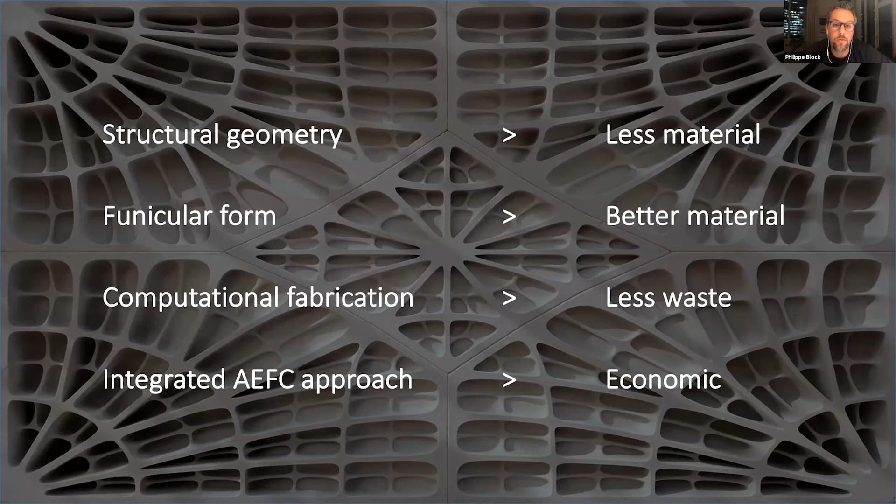This was not the focus, but everything we do can only happen when we break the sequential process - an architect sketches something, then an engineer tries not to kill anyone, and then a contractor tries to build it as cheap as possible. Innovation will not happen like that, and it will never be economical if we don't team up from the beginning, designing for and with constraints. We do this through computational methods, demonstrated with the use of COMPAS.

I'm very excited and thankful again that I could present our work. I hope this motivated you, and I'll be happy to take any questions if there are any.

Thank you, Philippe. I think it is a wonderful presentation, stressing the necessity to think about these fundamental questions from a technical perspective, to escape from the mainstream discourse. Sometimes we have to be critical about how we think about processes and materials, and I think what you are bringing are not only real numbers, but specific projects showing the potential of transforming the ongoing paradigm in construction, which is, as you said, something that requires an urgent response. Thank you so much for the presentation.